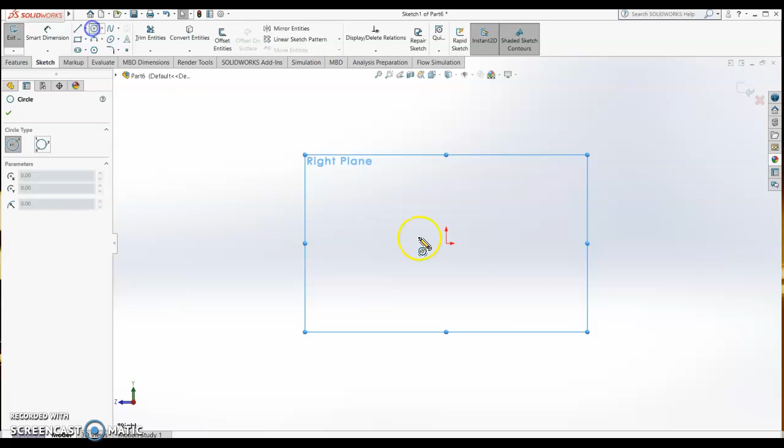Okay, so on right plane, sketch, draw two circles. Alright, smart dimension. This is 50

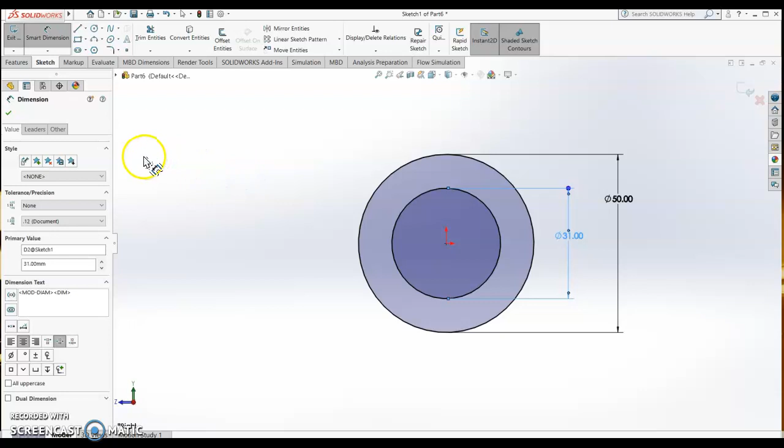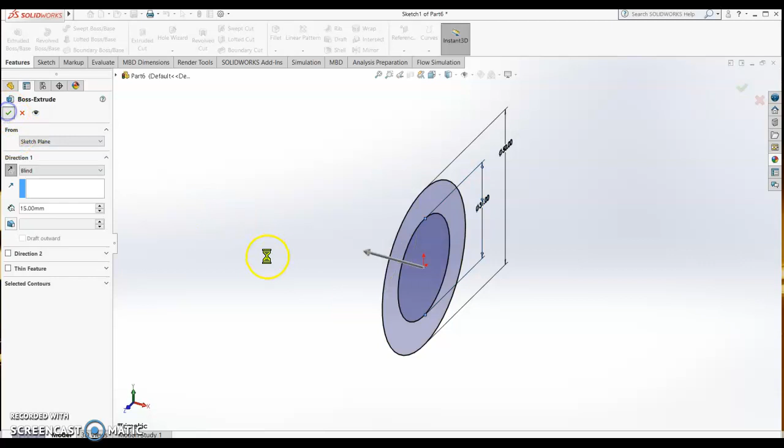and this is 31. Enter. And then features, extrude boss base, 15. Okay, go the other side, 15. Check, check. Alright, so it's ready, 15.

So this is right plane. So on front plane, right sketch, normal to.

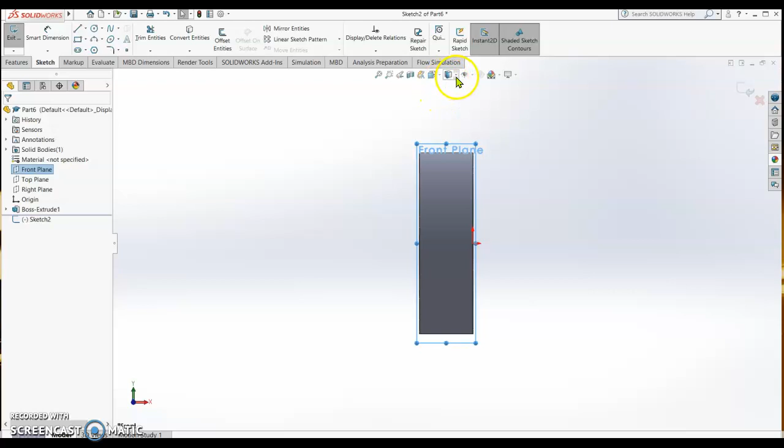We are going to draw the line, okay, so that I can see. I put it transparent. Alright, so I'm drawing to make a line from this point to this point, horizontal line. Okay, I close the sketch and then the same thing, front plane sketch.

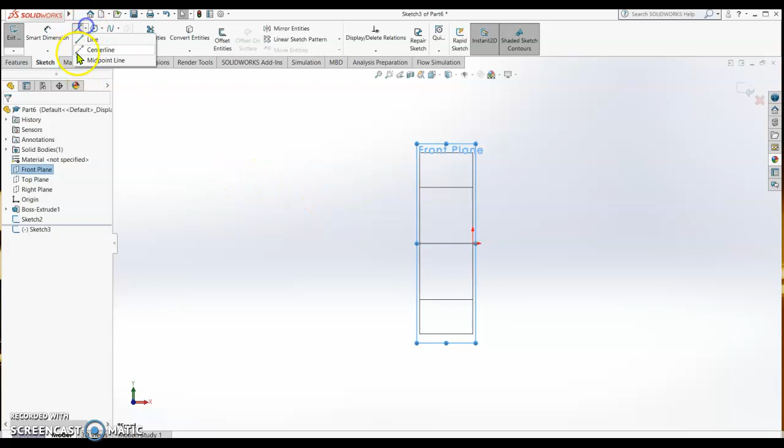I'm going to make a construction line. So from this point to this point.

Alright, escape. And from here we are going to draw the profile of the thread. So similar profile we do on the piston. It's 3 by 3.

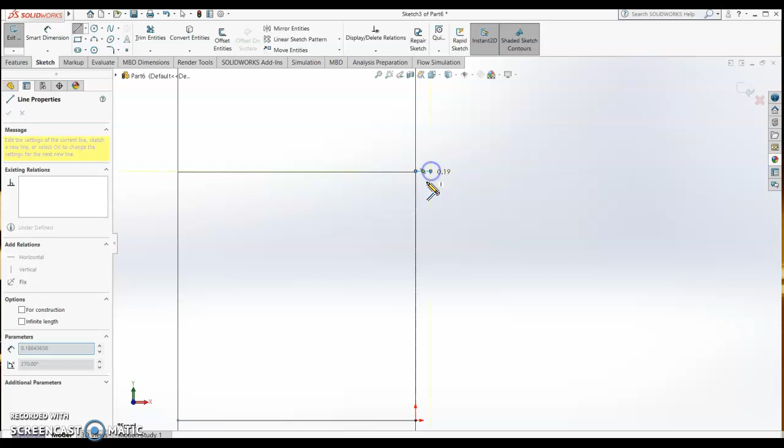So 1, 2, 3. You make smart dimension. Okay, smart dimension, the height is 3. So 3. And then this one is 1.5.

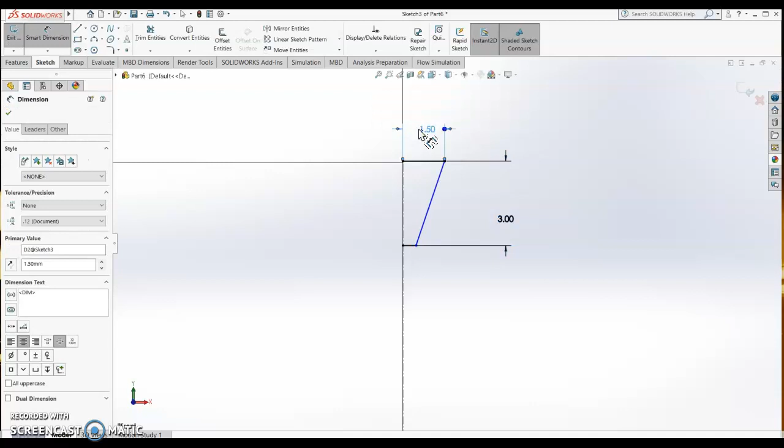Alright, now we are going to mirror. So this one, this one, this one, mirror about this one, check. So we close,

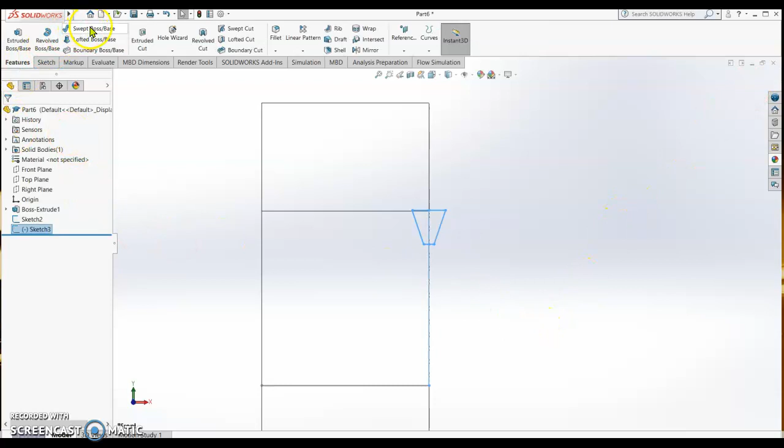and then we go swept boss, right? We select this one as the guide and then we go option.

We select specify twist value. We put revolution, then we put revolution. Okay.

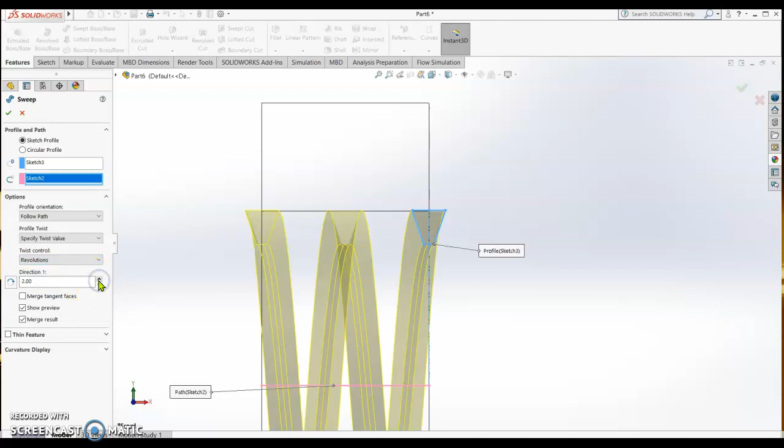So this is the tooth. So we make sure that the pathway is the same. Alright, so done. Because if I put one more, so cannot, so it's until here only, check.

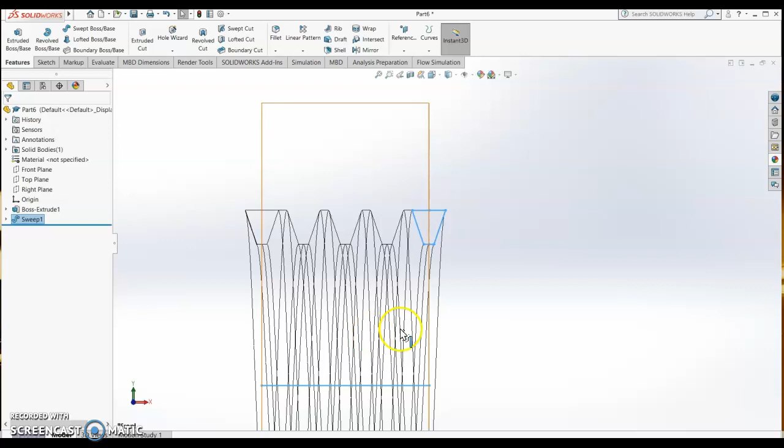So the thread is done. We can now put here and let's see the thread. Okay, we got the thread already.

Now we are going to cut the excess. Okay.

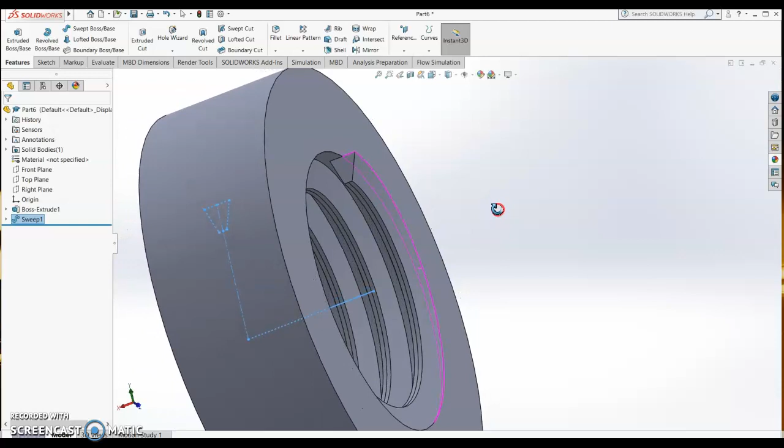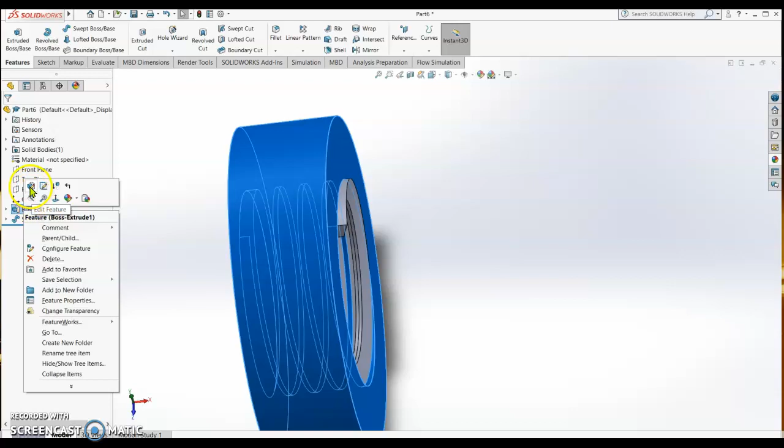So to cut the excess, we can increase and cut. So meaning this one, extrude boss, I make it 20 or even 25. Okay, enter.

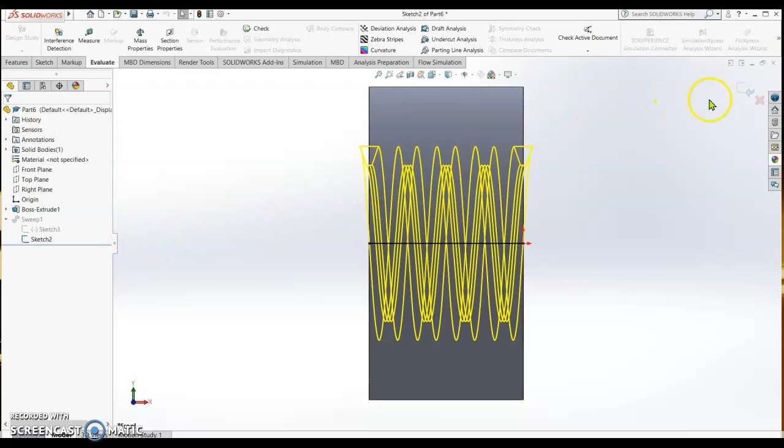Check. And then on this sketch 2, edit, normal to. Okay, still there. So now on the sweep, I can make it increase the revolution.

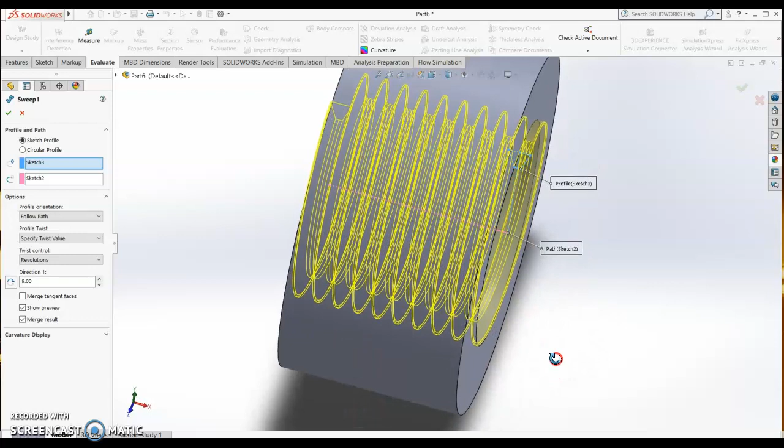5, 6, 7, 8, 9. Okay, check.

So now we are going to cut with a 15 remaining thickness. So therefore, still on top plane, sketch, normal to.

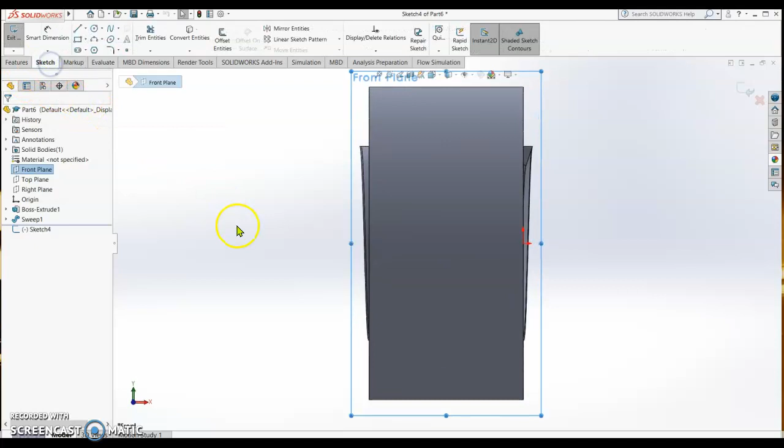Alright, we go a box. We are going to put now the smart dimension. It should be 15. Enter. And then we go one big box.

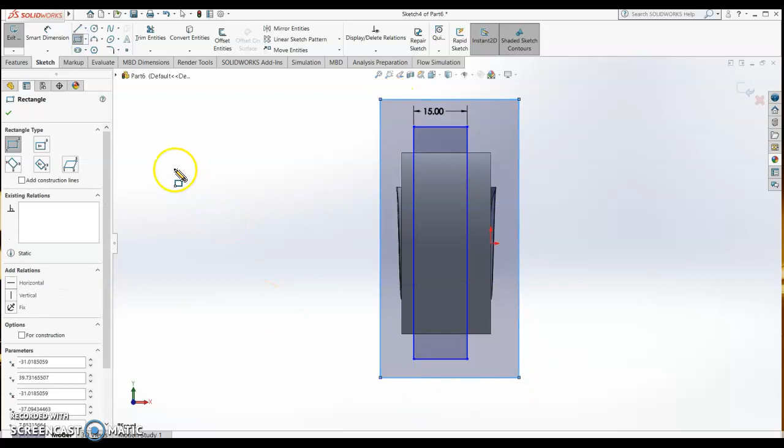Alright, and then features, extrude cut. So through all both. Alright, check.

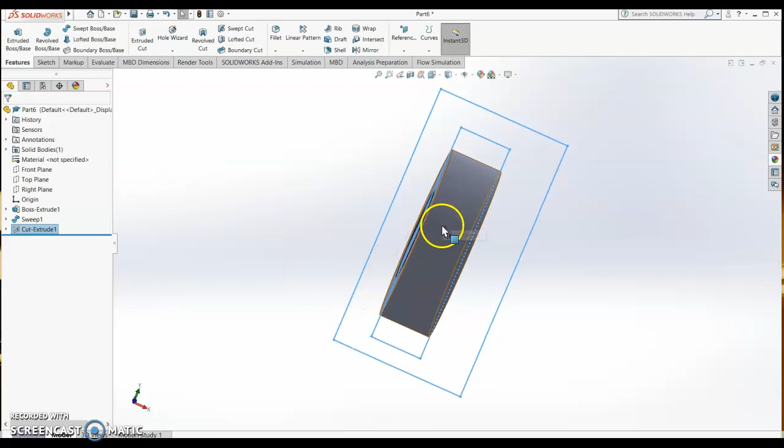So this is now our threaded adjuster nut. Now we are going to design the slot for the adjusting.

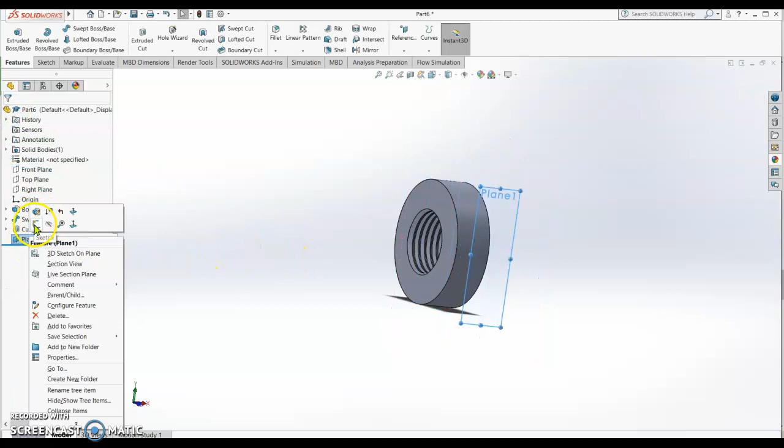We are going to insert plane, front plane. Make sure that the plane is outside. So we sketch on the plane. We are going to sketch a slot.